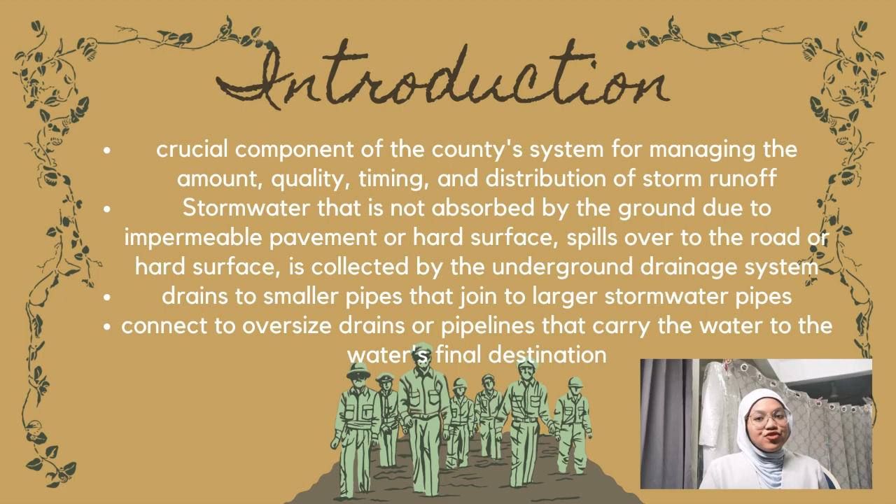So stormwater that is not absorbed by the ground due to impermeable pavement or hard surfaces spills over the road or hard surface and is collected by the underground drainage system. Stormwater in metropolitan areas drains to smaller pipes that join larger stormwater pipes, which in turn connect to oversized drains or pipelines that carry the water to its final destination, which may be streams, creeks, rivers, or even the ocean.

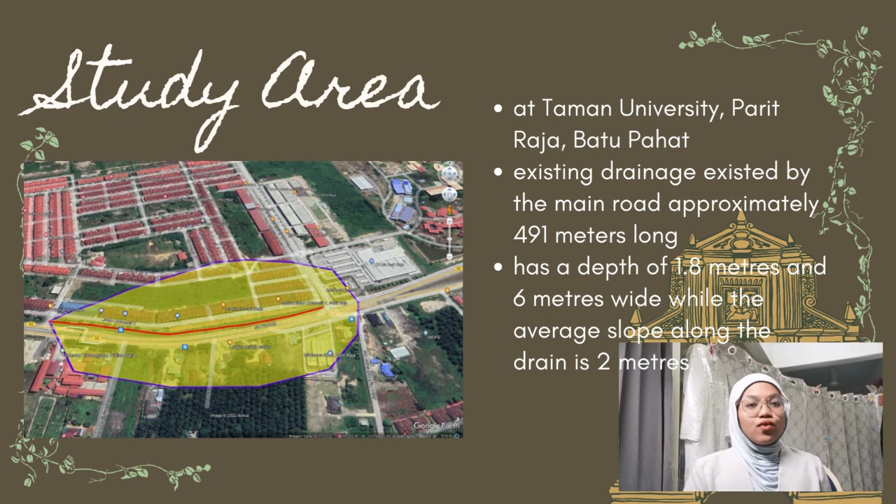So this is the study area for our project that has been stated in the project instruction, which is at Taman University Parit Raja, Batu Pahat. The existing drainage runs by the main road, approximately 491 meters long, with a depth of 1.8 meters and 6 meters wide, while the average slope along the drain is 2 meters. So just now we saw the study area of this project.

Okay, the problem statement of this case is that the drainage system was not designed properly to mitigate the floods and heavy flow overspilling the road, and the size of the flow channel is also not suitable for the area and needs to be analyzed precisely in designing the stormwater drainage system.

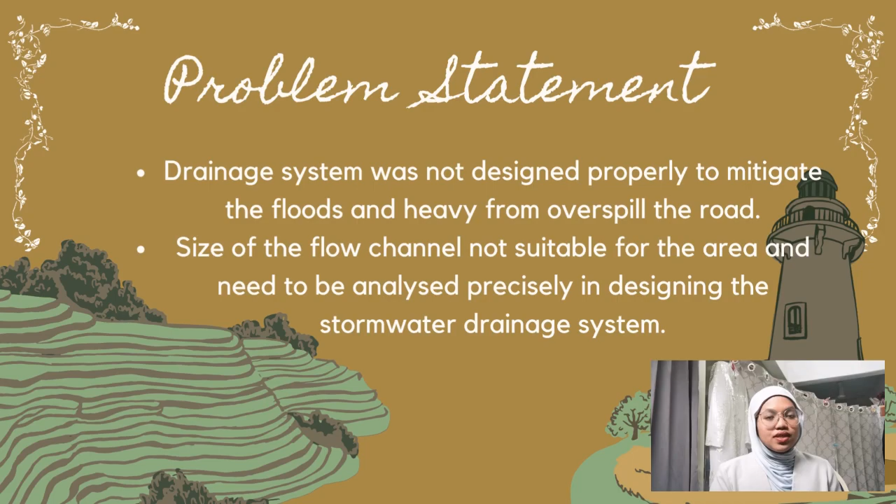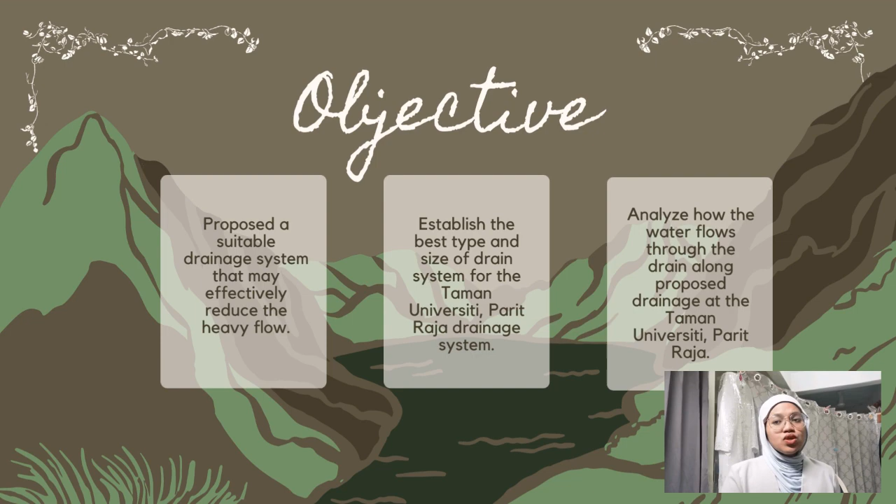Okay, so the objective of this project is to propose a suitable drainage system that may effectively reduce the heavy flow. The second one is to establish the best type and size of drain system for the Taman Universiti Parit Raja drainage system. And the last one is to analyze how the water flows through the proposed drainage at Taman Universiti Parit Raja.

Hi, my name is Akmaluddin bin Nurain, and I will talk about methodology. Which methodology do we use? The first step is a site survey, where we survey the area and find the landscape of the area, the slope, and the size for the design. Then we go to the rational method.

From the rational method, we need to find the peak flow, which is Q, and to find it, we need to use Google Earth to search for the catchment area, the area for water to flow into the design place. And we need to use the Urban Stormwater Management Manual to find the calculation for the peak flow, and we use it because it has step by step guidance and accurate data, such as slope and such things.

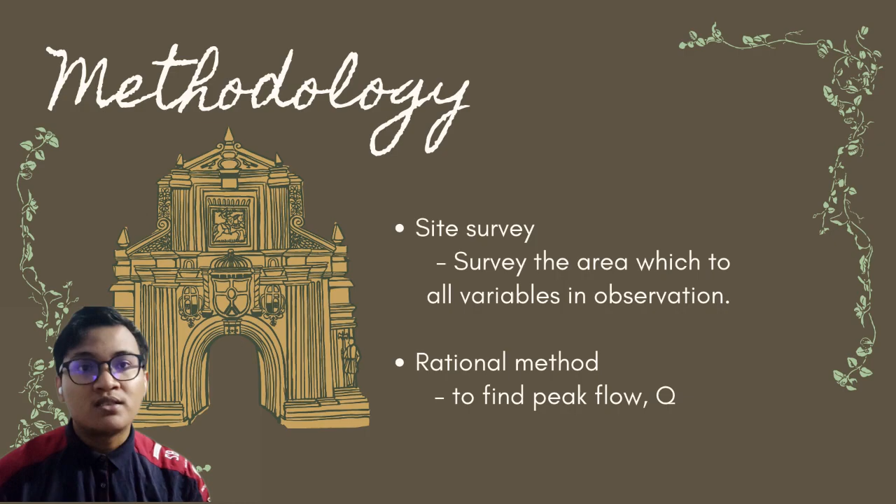Then we proceed to the design. Assalamualaikum warahmatullahi wabarakatuh. My name is Ahmad Shauki bin Roslan, matric number DF210064. So I will continue our presentation on the analysis part.

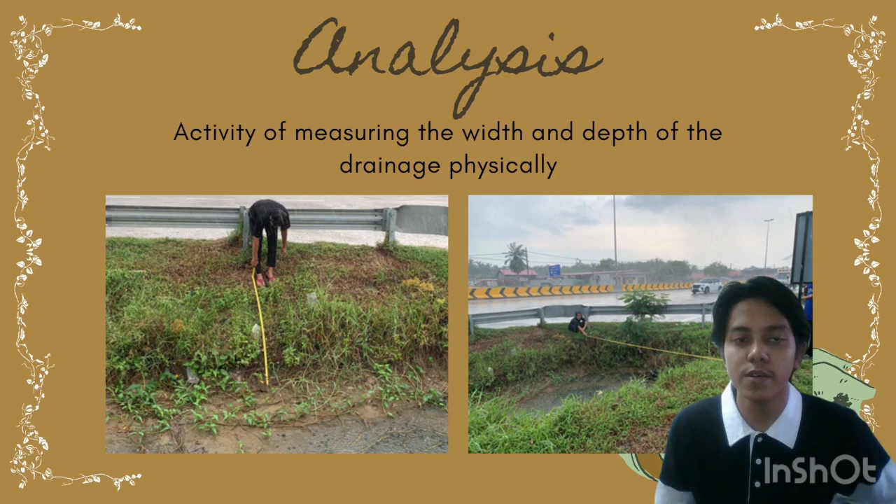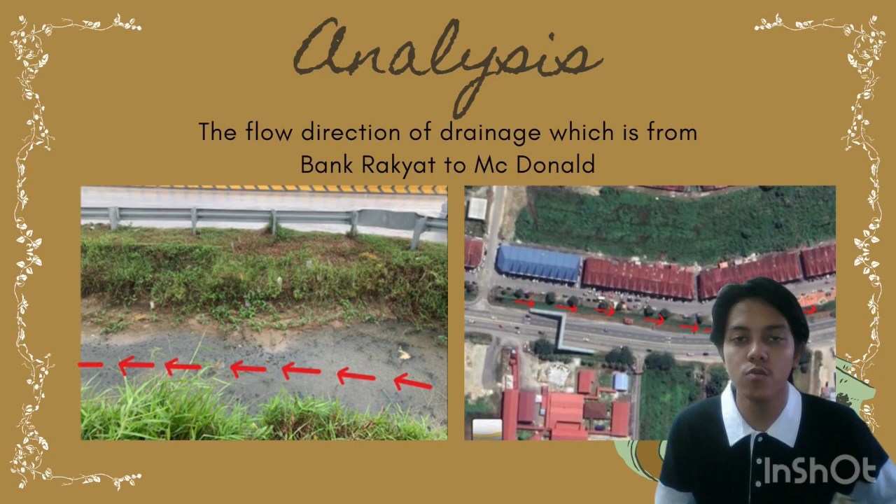So in this study, we conducted a survey to obtain several important pieces of information that we can include in our report. This picture shows the activity of measuring the width and depth of the drainage, and also inspecting the flow direction of the drainage. Based on our inspection, the water in the drainage flows from Bank Rakyat to McDonald's. Next, for the drainage area, we chose a catchment area randomly, but it is nearby or close to the study drainage area.

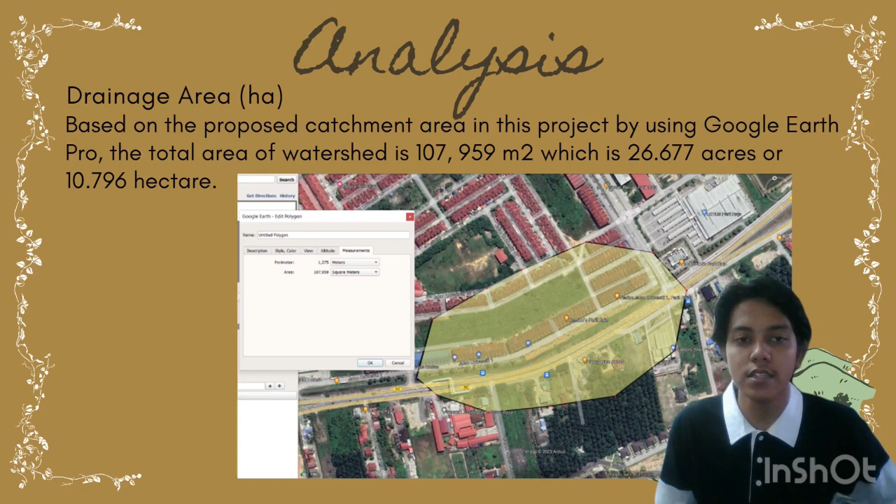So to get the total area, the application that we use in this part is Google Earth Pro. This is our proposed catchment area. The total area of the watershed is 107,959 square meters, which is 10.796 hectares.

Next, total length and elevation of drainage. In this part we also use Google Earth Pro. The total length of drainage we got from Google Earth Pro is 490 meters, while the elevation of the drainage is in the range of 8 meters to 10 meters.

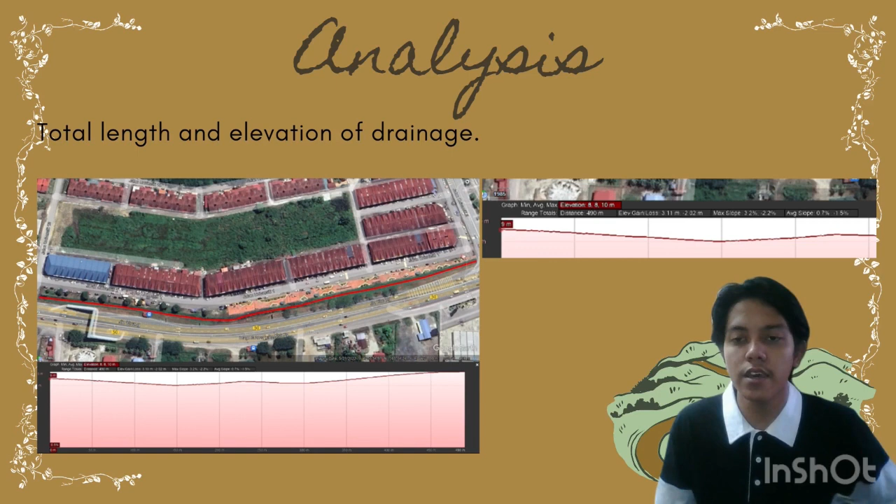So I think that's all from me.

Thank you. Alright, next, for the analysis, as we calculate from the real channel size, we got the top width is 5 meters, the depth is 2 meters, and the bottom width is 4.5 meters. Okay, for the N value, roughness coefficient, we have 0.035 because the channel is a grass drain. The area A is 18 square meters. The value P, which is wetted perimeter, is 8.5 meters, and R, which is hydraulic radius, is

2.1176 meters. For the S, which is slope, we have 0.0041 meter. For the TD, which is drain flow, the value is the same as D, which is storm duration D. The value is 0.045 hour. Next, for the T value, the average recurrence interval is 100 because the type of development is commercial and business. So we got 100.

For the value I, which is rainfall intensity, we got 454.771 millimeters per hour. The values of lambda, K, theta, and N, we refer to the table in chapter 2, appendix 2B or 2B.1 in MSMA, where our channel refers to station JPS Batu Pahat Johor. The lambda is 64.099, the K 0.174, theta 0.201, and the N value is

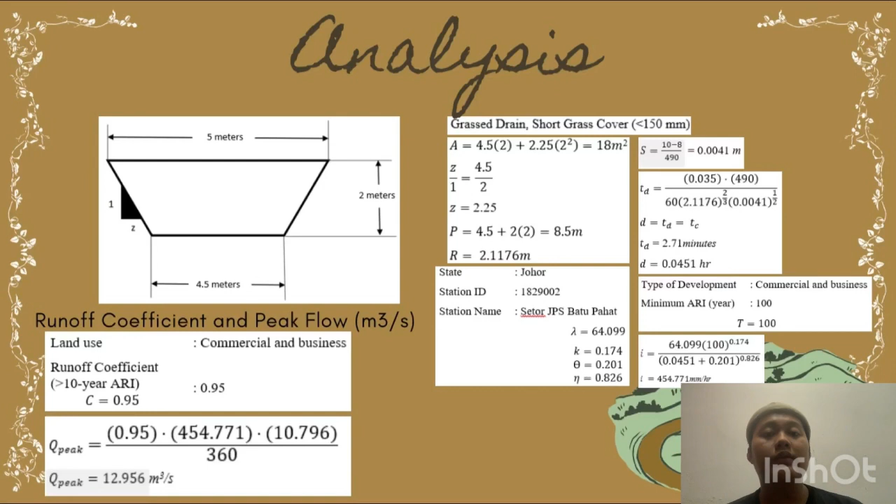0.826. As we know, the land use of this channel is commercial and business, right? So the C, which is runoff coefficient, is 0.95. Okay, last but not least, for peak flow for this channel, we get 12.956 cubic meters per second.

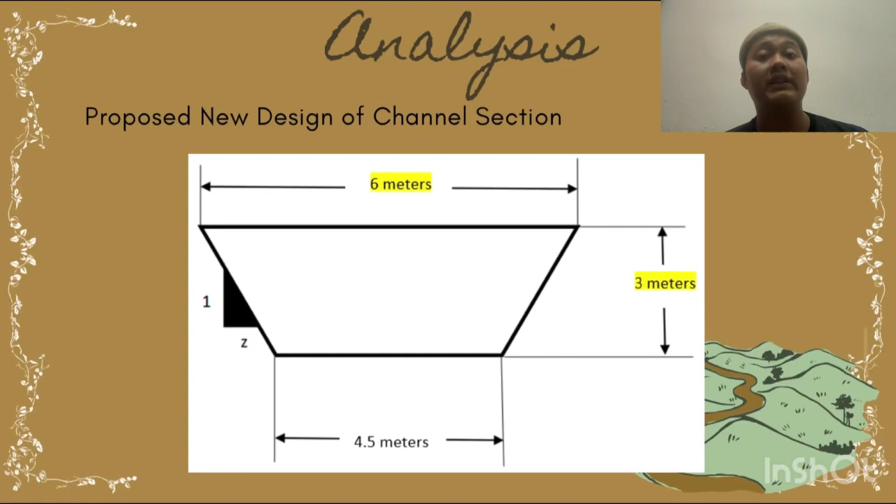Next, for the proposed new design of the channel, we change the value of top width and the depth, which is 6 meters and 3 meters respectively. The value of the bottom width is still the same, which is 4.5 meters. Because the channel is a grass drain smaller than 150 millimeters, the value of roughness coefficient, which is N, is also 0.035. The area is 27 square meters.

Z value is 1.5. Wetted perimeter is 10.5 meters, and the hydraulic radius is 2.5714 meters. The value of D is the same as TD, and we get the value 0.0396 hour. Next, the slope is 0.0041, same as the original channel.

Okay, for T value, which is the average recurrence interval, it is 100 because the type of development is also commercial and business. The values of lambda, K, theta, and N we refer to the table in chapter 2, appendix 2B or 2B.1, in MSMA, and they are the same values I just said, where our channel refers to station JPS Batu Pahat Johor.

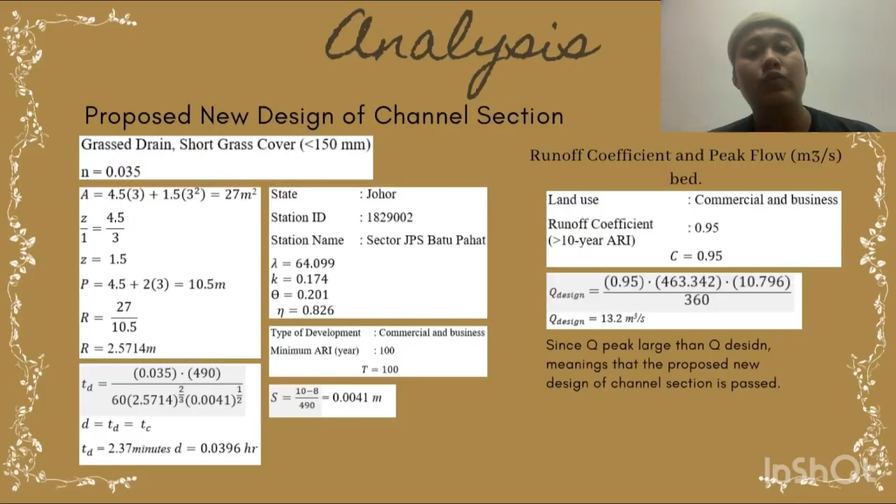From the discussion, the design flow of the discharge was found to be higher than the peak flow of the discharge, which means that the proposed new design of the channel section passes. As you can see in the table below, there are a few changes that we took note of, as it will help to reduce the risk of flood. In terms of dimensions, the width and depth increase by 1 meter to contain and store more water during rainy seasons and flow easily without any risk of clogging.

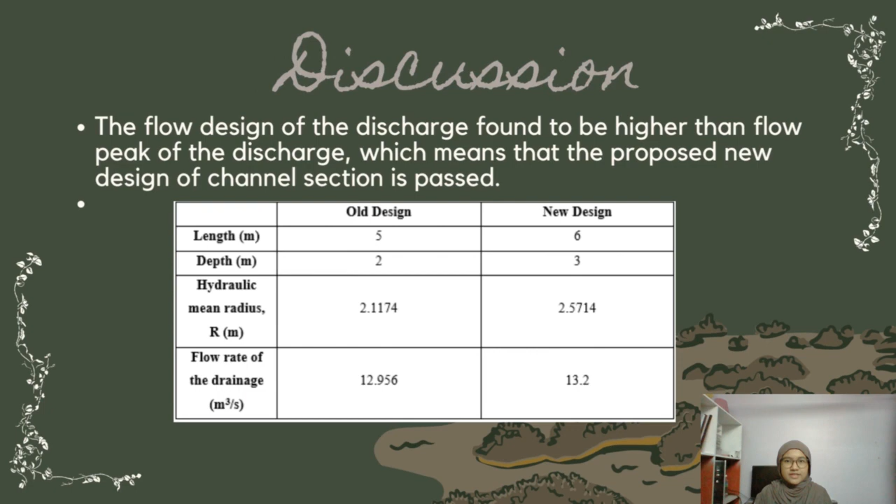In conclusion, hydraulics is a diverse field that plays a vital role in society, especially in civil engineering, in order to develop water resource infrastructure so that negative impact on the environment will be insignificant. In the case of this project, floods have become common in every city, especially during monsoon season. At the project site, it shows that the drainage has more area underneath and it is too shallow, which causes the water to flow irregularly, especially during rainy season, where rainwater is excessive.

So, in order to prevent floods in this area, the dimensions of the drainage must be larger than they used to be. This will ensure that it can store excessive water efficiently.